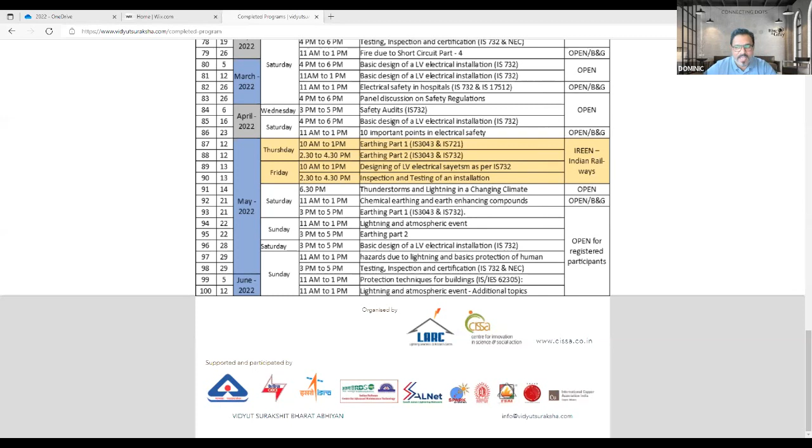Good morning, ladies and gentlemen. Today we are going to discuss an interesting subject on electrical safety: earthing, especially earth electrodes in soil - what they are and how they function. Chapter 17, don't look at that, it was part of my larger presentation; each section is 2 hours. So today we are going to discuss earth electrodes in soil.

Let me switch off the video for better connectivity. Now, the first point: almost every electrical engineer nowadays, not only electrical engineers but almost everybody working in a building, including tenants and owners, believes that a good earth electrode will solve all electrical safety problems. So whenever there's an issue, a shock, fire, arcing or sparking, the first job people do is to improve the earth electrode resistance. Today we are going to discuss whether this is really necessary or not.

Now, regarding the existence of earth electrodes, all of you know well that we used a protective device in low voltage engineering called ELCB, earth leakage circuit breaker. During the earlier days, nowadays ELCB is not even available in the market, but during the 1970s, 80s, 90s, or even 10 years back, ELCBs were quite common. What are these ELCBs? Imagine a transformer, a three-phase connection to some equipment, with a neutral as well, and I'm showing a TT connection where the consumer premise is connected to an earth electrode in soil.

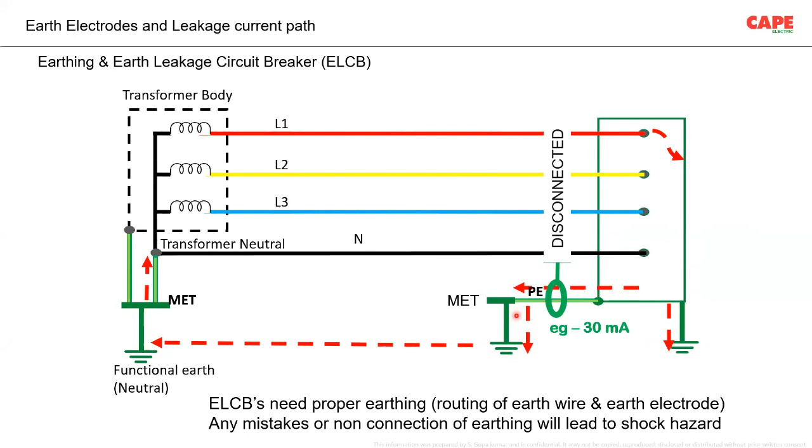But you should understand that ELCBs are nowadays outdated. Nobody uses ELCB in the market, I don't think it's even available anymore, except in some old installations. Nowadays, ELCBs are not used. You should also understand that for an ELCB, proper routing of the earth conductor and the earth electrode was important. However, currently, what we use for earth leakage protection or earth fault protection in a TT system is an RCD, a residual current device.

What does the residual current device do? It measures the current at a junction - the current of all the live conductors, all the current carrying conductors. Whenever there is a leakage of current, the current is escaping from this circuit, escaping from this junction. This device measures the current escaping from the junction, say 30 milliampere, and it trips.

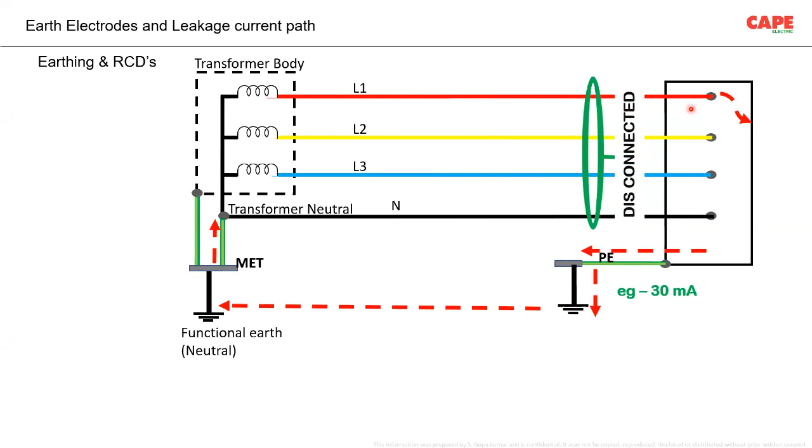Now you must understand the difference between ELCB and RCCB. Imagine in an RCCB there is no earthing. Imagine there is no earthing at all. The RCCB will not trip, and the body of this panel board will be live. As soon as the person touches it, since current starts flowing through the body of the person, the RCCB will immediately trip. So from this, you should understand that if you are using an ELCB...

Proper connection to the earth electrode, and the earth electrode itself, is important in order to ensure disconnection of the supply. Whereas in case of an RCCB, even if the earth electrode or earth connection is not available at all, the person will get a shock and the RCD trips. RCDs can be used as a protective measure against direct contact. Direct contact means even if somebody touches the live part, where I am scrolling, immediately the RCCB trips. Whereas with ELCB, it's not the case.

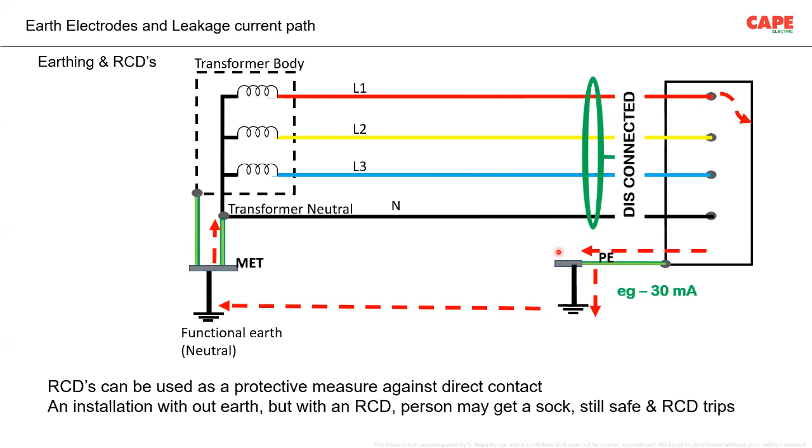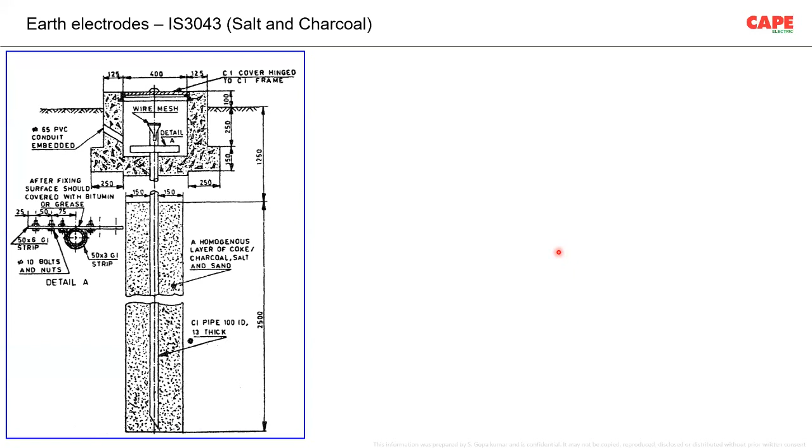So the use of ELCB and earth electrode was very important during olden days, especially before the introduction of RCCBs. After the introduction of RCCB, earthing and protective equipotential bonding is still very necessary and mandatory. But imagine in an installation you forget to connect to the earth electrode - still you are safe, because a person touching accidentally on a live conductor may get a shock, but before the shock becomes hazardous or serious, the RCCB trips. In IS3043, you can see two pictures.

One is how to make a typical way of making an earth electrode in soil, a vertical pipe and a plate. To my knowledge, these two are the pictures which are spoiling the whole knowledge on earthing.

After seeing this picture, people think that earthing means you buy salt and charcoal, dig a hole, put a pipe, fill it with salt and charcoal, then make a chamber and all these things. There are government buildings - last week I was at a railway station.

Outside the railway station, I could see at least 20-30 chambers. On the left side, you can see the chamber. Each chamber is about 200 millimeters above the soil level. This was actually spoiling the entire place. So basically, people think that earthing is as per these two pictures.

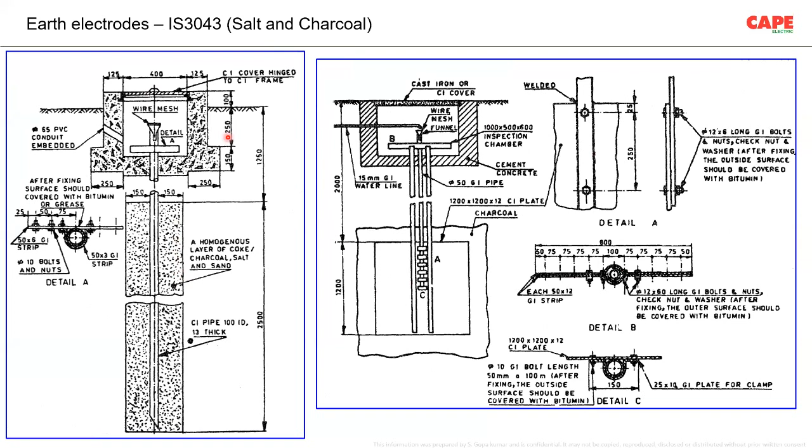I am so sorry to say that these pictures only give a typical example of making an earth electrode in soil. Whether you need an earth electrode in soil or not is explained in the standard, and most probably in a TN system, earth electrodes are not very much mandatory. In TT, of course, yes, we will see it later. As a result of these pictures from the IS standard, which was a very old standard from the 1960s or 1970s...

As a result of these two pictures, invention started. People started coming out with different earth electrodes - clean earth, computer earth, digital earth, analog earth - all these different names came into existence in India because of these two pictures. People started treating these as innovations of earth electrode. Unfortunately, wrong innovations. The second part is earth farm.

There are places where so many separate earth pits are made, each one for a typical application - like one or two for DG neutral, two for DG body, two for transformer neutral, two for transformer body, and so on. I call this an earth farm, a useless earth farm.

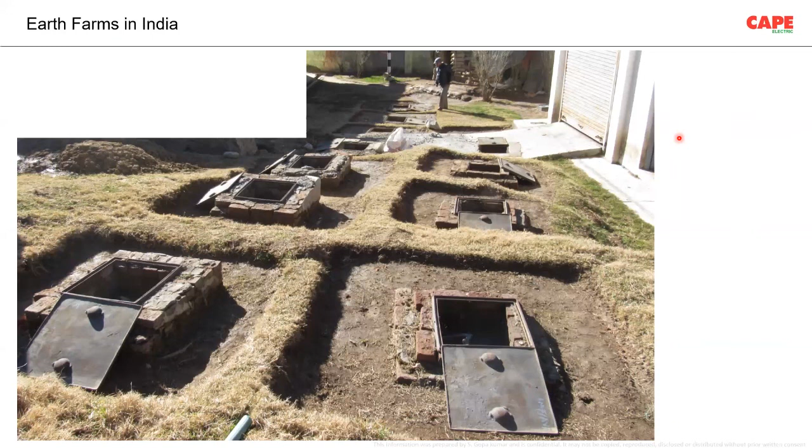Similarly with modern buildings - 2 weeks back I was in a data center and I was actually laughing after seeing the number of earth electrodes. There were about 220 earth electrodes all around. You actually require one, and there are 220. I don't understand why people use so many, and these are reasons for accidents.

But the way we follow electrical safety in our buildings, even if this kind of earth bomb happens, you shouldn't be surprised, because each part of the building is connected to a separate earth electrode. Then the joints get corroded, and such explosions happen. If somebody asks whether explosions are possible, I would say yes, of course. But I don't know whether this case is due to that kind of earth electrode or not.

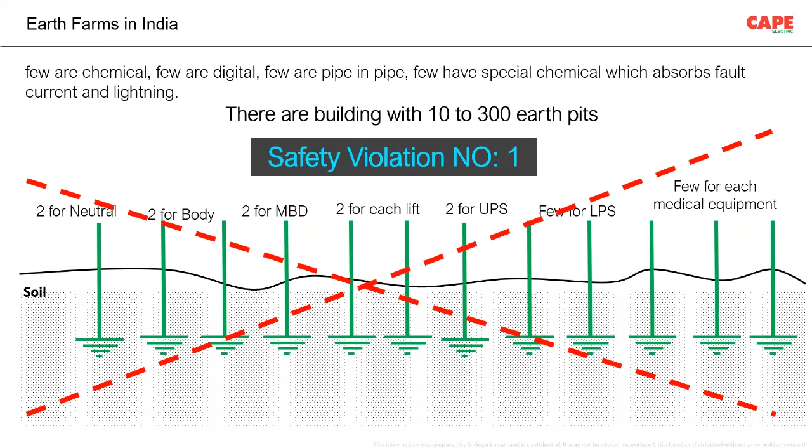So the first evil against electrical safety in India is the story called '2 for neutral, 2 for body.' This is the first safety violation. I repeat this every time in my presentation because it is the most important violation happening in India.

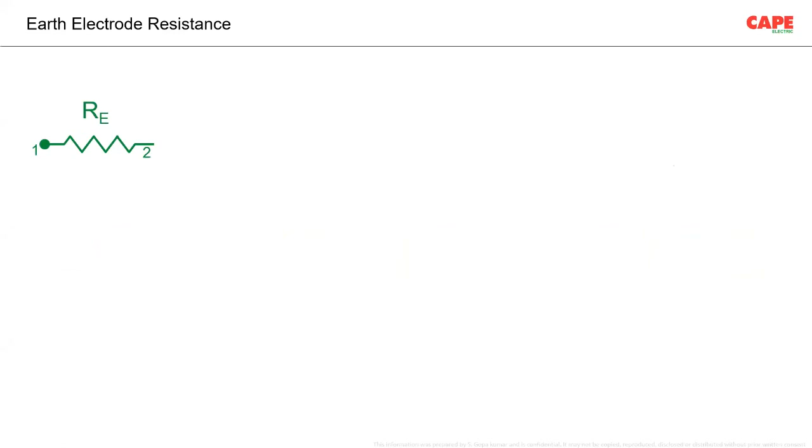Now let's look at what exactly this earth electrode resistance is. I am just showing a resistance RE. Generally, RE is the earth electrode resistance. The symbol is from point number 1 and 2. So point number 1 and 2, from here to here, there is the resistance.

And where is point number 2? Point number 2 is the infinite earth. Earth is infinite - it is zero potential. This is the belief, or this is the way we do things.

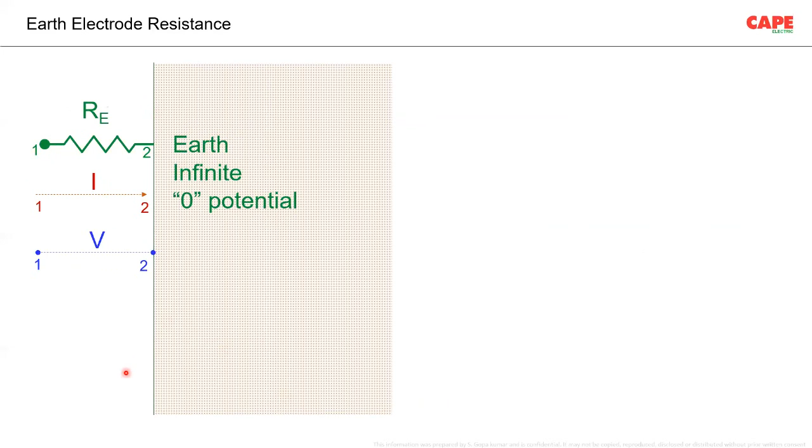You have the resistance R, and whenever there is a current flow through this particular resistance, there is a voltage drop in that resistor. Let us say in a typical case, whenever there is a current flow through this resistance, a voltage drop is created. Now if we put it in an actual situation, you can see the earth electrode number 1, the point at which you are connecting is point number 1.

Then you have the earth electrode in soil. Then you have, like a sphere, there is an area in soil, and your infinite earth is point number 2, which is far away from the earth electrode. Nobody knows how far. We can only make some calculations and take some approximations.

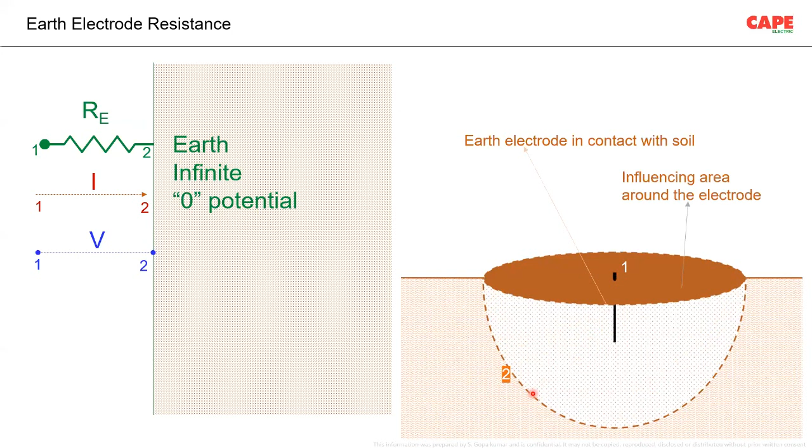So basically the electrode resistance, which we call Re, consists of three factors. There is an earth electrode, there is an influencing area around the earth electrode. Number one, the resistance of the earth electrode itself - imagine you have a 3-meter rod having some milliohms or micro ohms resistance. The contact resistance between the electrode and the soil.

The third one is the resistance of the soil from the electrode surface outward, in the geometry setup for the flow of current outward from the electrode to infinite earth. So the third factor, which is the soil in between the earth electrode and the infinite earth - these three factors influence the resistance Re.

Out of these three factors, the first one, resistance of the metal electrode, is actually immaterial because it's negligible. The second point, the contact resistance between earth electrode and soil - even though we generally say the first two are immaterial, actually sometimes the contact resistance also matters.

How does it matter? For example, if you have earth electrodes in rocky areas, you dig a hole and you fill the hole again with some stones. Under that condition, the earth electrode is not in good contact with the soil, so the contact resistance is high. Under that condition, number two is also a significant value, but generally the first two are neglected.

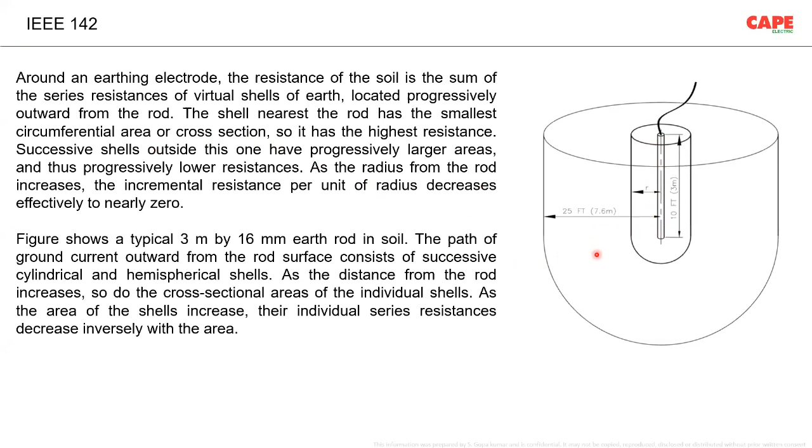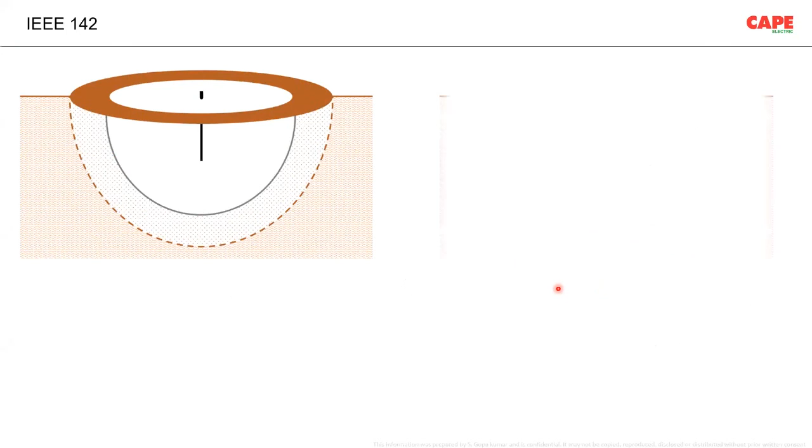They have put a rod, a 3-meter rod, and tried to measure the electrode resistance and its influencing area. And the influencing area is like this - each electrode has got multiple spherical areas which influence this particular rod, the resistance of this particular rod.

I have an equivalent circuit, I will show you. It is like, you see the resistance of one sphere, the resistance of 2, 3 spheres, 4 spheres, and finally n number of spheres. The resistance connected in this kind of fashion to the infinite earth zero potential, combined, we can call this the resistance Re.

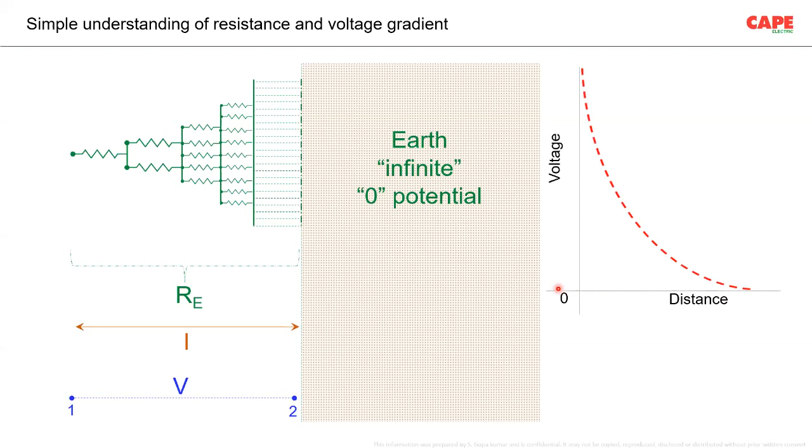Whenever there is a current flow, there is a voltage across that Re, which we call the voltage gradient. So at the point of the fault, whenever the current starts flowing, the voltage is at peak, and this peak is equal to the operating voltage of the circuit which is in fault. Let us say, for example, the fault is created by a 230 volt line in touch with the earth. In that case, the peak of the voltage is 230 volt.

I repeat this again - whenever there is a fault in 230 volt, the peak of the voltage gradient is only 230 volt. Why I made this statement again is, I used to get calls from users. They say they have to design an earthing system, fault current is 50 kiloampere, soil resistivity is 50 ohm meter.

So they ask help in making an earth grid or earthing system of 50 kiloampere. Now, once I ask what is your demand, they say the touch and step potentials must be lesser than 2 kV, 1 kV, or 600 volt, some voltages. But practically, most of these inquiries are coming for applications like low voltage, 230 volt. Actually in 230 volt, of course there is a voltage gradient, but within half a feet, the majority of the voltage is over, the shock is over.

In 230 volt systems, this is not very important. Instead, you make a protective equipotential bonding. Now, however, for a high voltage system, depending upon the operating voltage, the voltage is fatal. As a result, step and touch voltages can happen.

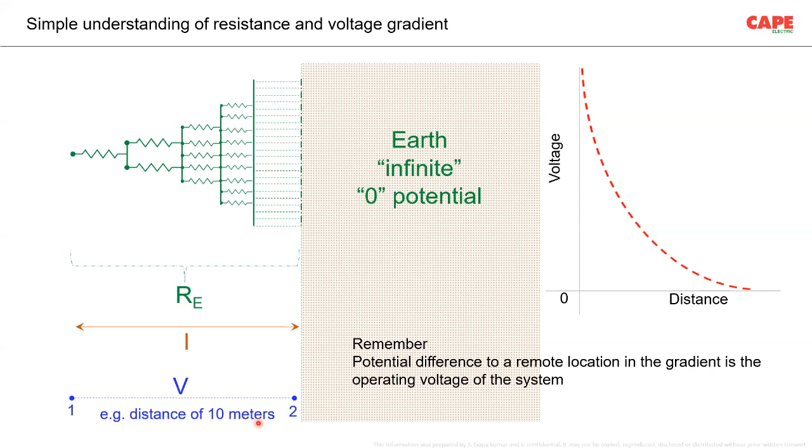For example, think that this voltage gradient is made at a distance of, let's say, 10 meters. If somebody asks whether in a typical place the 100% earth resistance is within this sphere of influence of 10 meters - technically it is not. In the IEEE 142 standard, you can find this particular table. They started measuring the resistance of the earth electrode with respect to distance, and approximately with a 3-meter rod, within 7.6 meters, the 100% value is achieved.

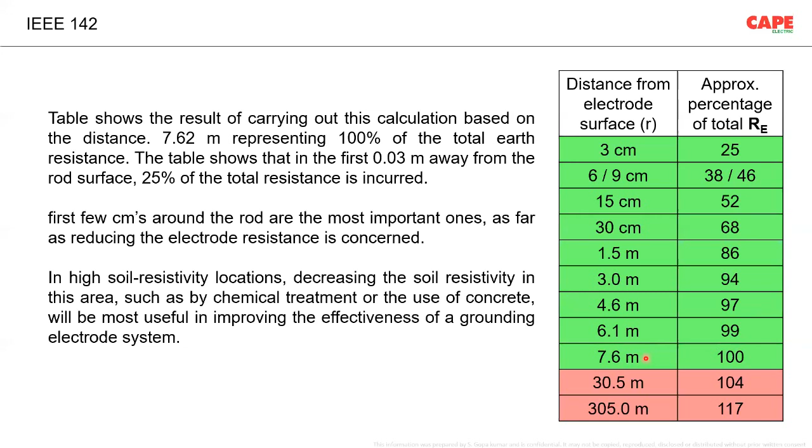But the measurement is still carried on at a longer distance, 30 meters, 300 meters. Still lower resistance values are possible, but the increase in influence is not significant with respect to the increase in distance. So a 270 meter increase gives only about 15% improvement. These are considered insignificant. As a result, we think that 100% is the RE value received within a typical area of 7.6 meters. This is only an example, but it varies from place to place depending on the soil resistivity.

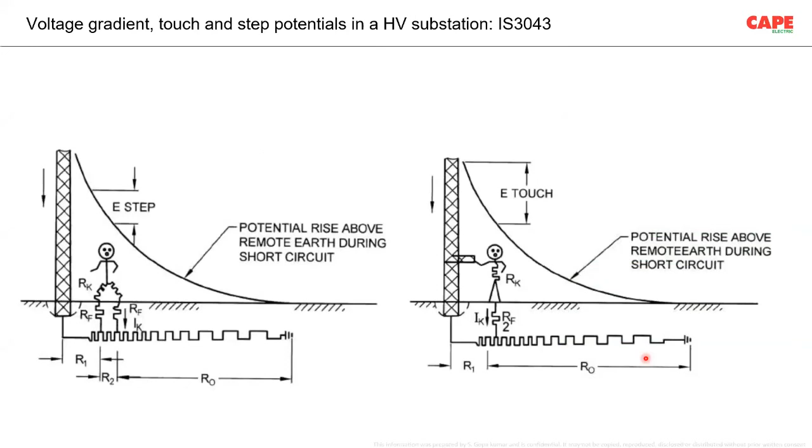For high voltage application, anything more than 1 kV, you have the step and touch voltage problems, which is explained in IS3043. Also in EN 50522, you can find these problems explained, such as the touch voltage, step voltage, and transfer potential.

Transfer potential, I'll explain here. You see, there is a transformer here, with an earth electrode plus earth grid. Whenever there is a fault current flow, the potential of this particular point is at a very high level. You have a touch voltage problem here, and a step voltage problem here.

Now the wire is also connected to a remote place. Let's say, for example, the armoring is connected to a different place. In that case, the armor will also carry the potential, and at a remote location there can be a transfer potential. So for high voltage applications, we are supposed to take care of step, touch, and transfer potentials.

Anyway, our subject is mostly into low voltage. Now, this is only an equivalent circuit which I am trying to explain, showing what will happen. You have a source, you have the line which is faulty, and at that place, faulty in the sense that it is in touch with the earth.

And now you have the RE here, which is going to create a voltage gradient at the place of the fault. And near the neutral, because the transformer neutral is also connected, there is another potential, the voltage gradient created.

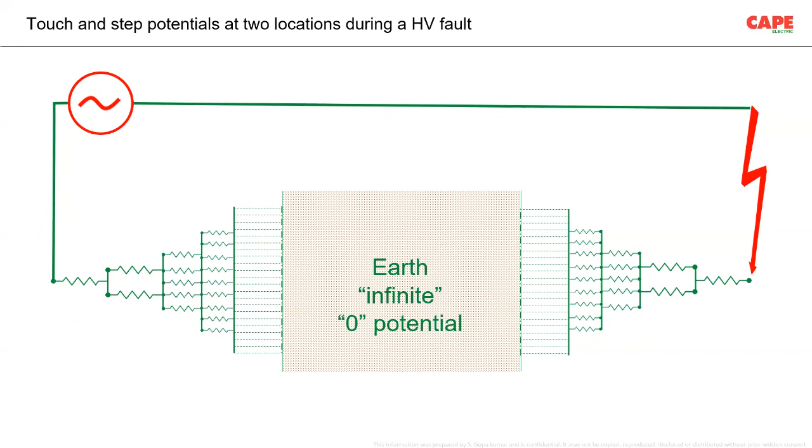Now, what you should always understand is - I am taking a red color line to represent if there is a metallic fault return path. If there is a metallic fault return path, actually the majority of the fault current will flow through the metallic fault return path.

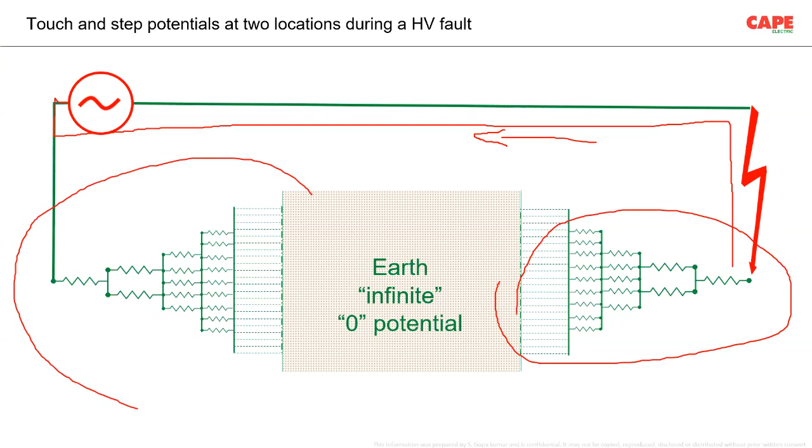But now, for high voltage substations, where the distance between the source and the secondary switching stations are far away, maybe tens of kilometers, hundreds of kilometers, then fault return through the metallic conductor is probably less, and in some cases the low resistance of these earth electrodes becomes practical. So basically, what you should understand is voltage gradients are created at the place of the fault, as well as when the current is returning back to the neutral of the system.

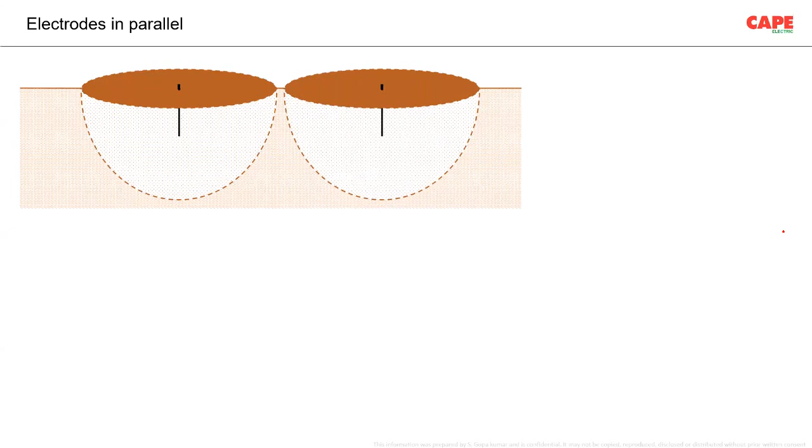Earth electrodes in parallel. In order to reduce the resistance of the earth electrode, a technique which is used is to have multiple earth electrodes in parallel. Remember, each earth electrode has got a sphere of influence. And if the second electrode is away from the sphere of influence of the first one, like the one in the picture, then you get a better value.

Earlier days, we were always saying that 2L is the distance between two earth electrodes. Imagine the L, length of one vertical electrode, is 3 meters, then the distance ideally, if it is more than 6 meters, gives a better value. But nowadays, standards, the availability of space, and other problems are coming up. As a result, the standards even started accepting at least L.

Spacing is required, is necessary. That means if you have a 3-meter rod, the next rod must be at least 3 meters away. Only then can you get better values.

Now for public electricity distribution, especially when you go for a TT system, there is a question whether the high voltage side and low voltage side are connected together or separated. Under certain conditions, electricity supply companies abroad consider this. In India, most electricity supply companies, to my knowledge, don't have this particular knowledge.

In Europe, or especially in the UK, in a TT system, the high voltage earthing and the low voltage earthing are separated for certain applications. If this separation is made, imagine this is the earth electrode of the transformer, and the neutral earthing at the secondary side of the transformer is made at the first post, at least 10 to 15 meters away. So higher distance is making a better value.

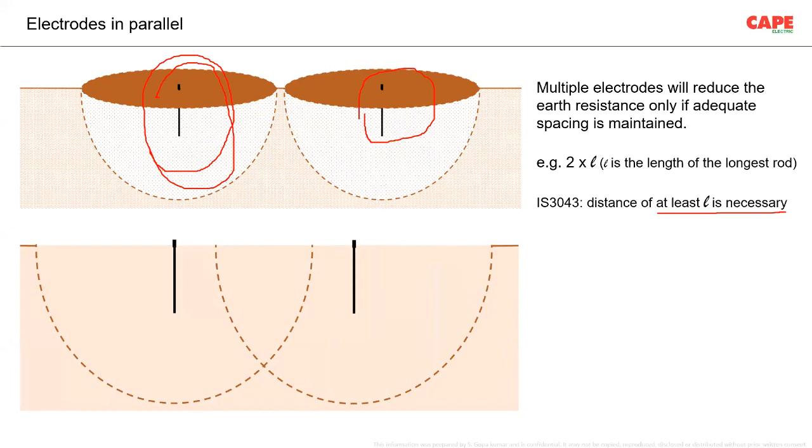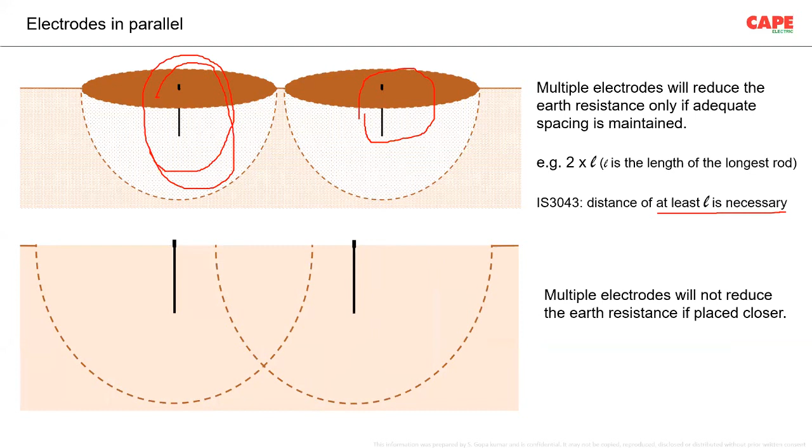Otherwise, multiple earth electrodes will not reduce the earth resistance if they are placed closer. But most electrical installations, if we visit practically, earth electrodes are connected quite nearby - 3-meter rods connected every 3 meters, or put in every 1 meter, not 3 meters, sorry, 1 meter.

Now for low voltage consumer premises. Imagine you have a house or a small industry where you are getting 230, 400 volt line, and if you have a TNS system, industrial and commercial application, earth electrode resistance is immaterial. In the sense, if the earth electrode resistance is 10 ohm or 50 ohm or 100 ohm, it doesn't matter. TNCS system for public distribution, earth electrode resistance is also immaterial.

TT system for public distribution at consumer premise, if you are using a 30 milliampere RCD, the resistance recommended in the standard is 1666 ohm - you can see it in table 14. If you use a 300 milliampere RCD in a TT system, then the earth electrode resistance is 166. These values are a little bit higher; probably it is not the earth electrode resistance, it is actually the impedance of the entire loop.

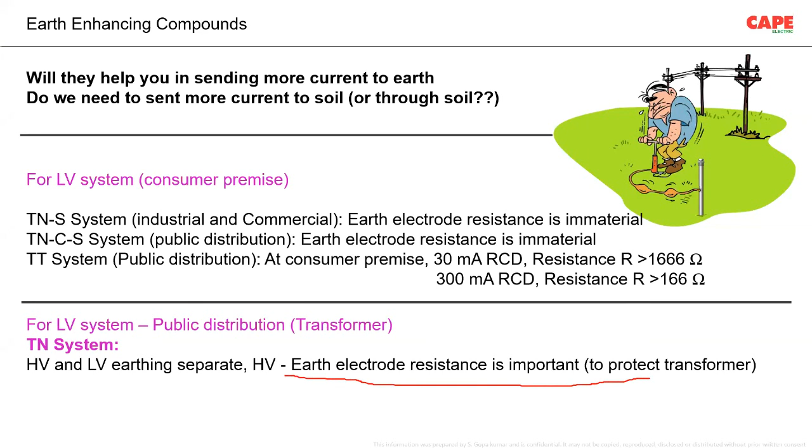Now for low voltage public distribution, for the utility company - the first one for LV system is applicable for a consumer premise if you are a user of electricity, whereas this is applicable for the electricity supply company. If they go for a TN system, and if they go for HV and LV earthing separate, meaning the transformer HT side and neutral earthing separate, then the high voltage side earth electrode resistance is important to protect the transformer.

Otherwise, the transferred potential during a fault at the HT side of the transformer may kill the LT winding. So for the public distribution company, if they go for HV and LV earthing separate, the HV earth electrode resistance is important. In case of a TT system, again if they go for HV and LV earthing separate, the HV earth electrode resistance is important to protect the transformer. If they go for HV and LV earthing together, then earth electrode resistance is important to protect the consumer premise - our houses.

What does this mean? Electricity can be supplied from the transformer under several methods - TNS, TNCS, TT and so on. If the distribution company is using a TN system and wants to make HT and LT earth electrodes separate, then the HV side earth electrode resistance is important. Number two, if they go for TT system and want to make HV and LV separate, in order to protect the transformer, earth electrode resistance is important. Now, if HV and LV is together, in order to protect the consumer premise, earth electrode resistance is important.

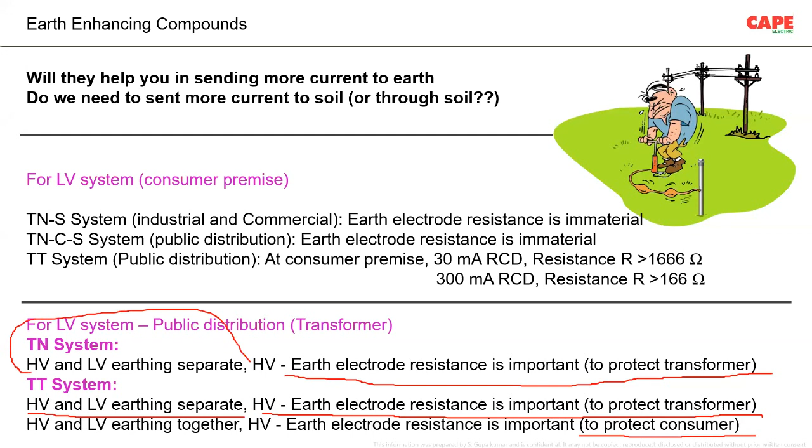But if we look at it from the point of regulation, we are actually supposed to follow the TN system, not separate but connected together, so that everything is safe. I will explain it later.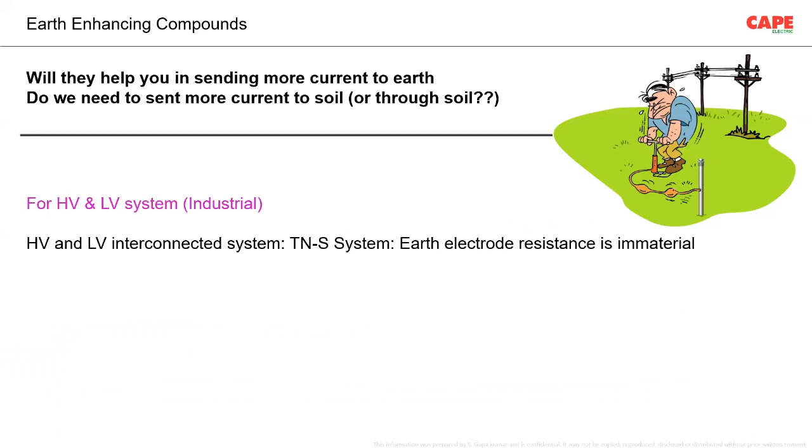Now, for industrial system - industrial and commercial system, what we mean by this is you have a transformer either close by, or you have your own transformer.

You have an 11 kV bar 400 volt transformer, or a 33 kV bar 400 volt transformer. In that particular case, if you go for a HV and LV interconnected system, meaning the HT side and the LT side are interconnected, and your LT is a TNS system - this is the recommendation of the standard. In that case, earth electrode resistance is immaterial - you don't need to measure or have an earth electrode of 1 ohm, 5 ohm, 10 ohm, 20 ohm or whatever. That is immaterial. Now, for lightning protection system...

If type A lightning protection system, earthing is important. In fact, electrodes in soil are important. Lightning protection system earthing is classified into type A and type B. Type A can be a vertical or a horizontal conductor. I have a picture I will show you later on.

If you go for type A earthing, one of the techniques adopted is a 10 ohm resistance. So if you practically look at today's modern building where you have your own transformer, or a transformer very close by, the only place where you want a 10 ohm resistance is an earth electrode for the lightning down conductor. If you go for type B earthing, foundation earthing, or ring earthing, then this value is also immaterial. In type A earthing, the earth electrode may require an earth electrode resistance lesser than or equal to 10 ohm - we will see this later. This is the only place where you need a specific value of earth electrode resistance in an industrial, commercial, or consumer premise.

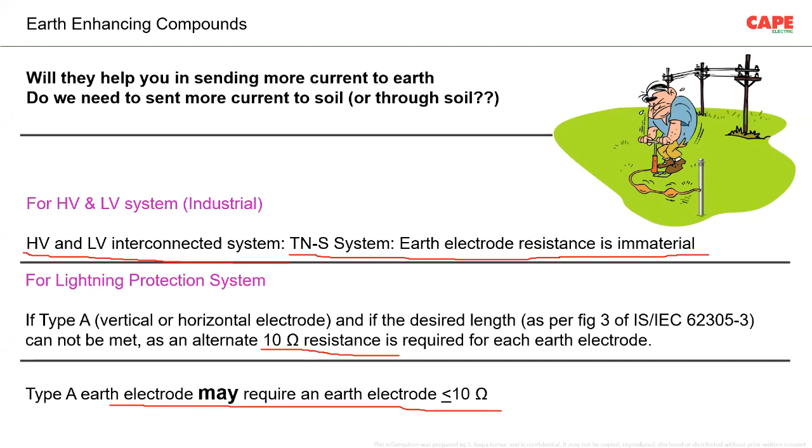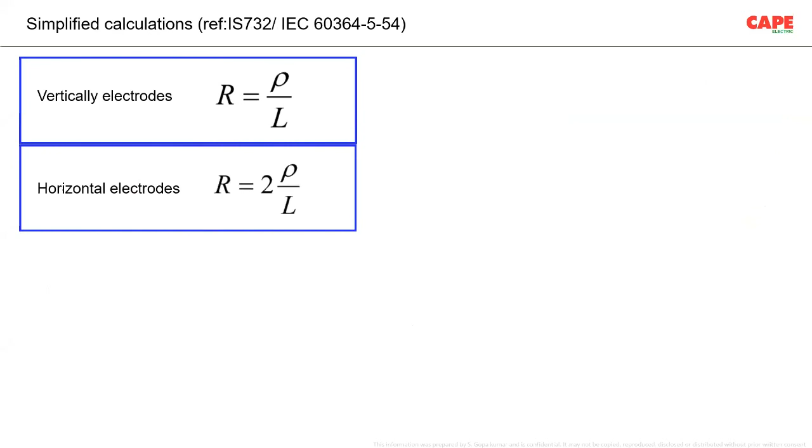Now, how to calculate the earth electrode resistance? In IS3043, a lot of formulas are there - complicated formulas. But nowadays these formulas are being simplified. IS732 has got very simplified formulas like this.

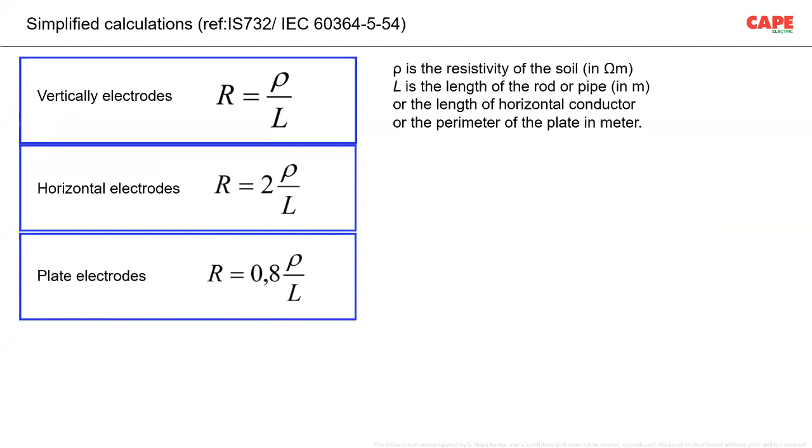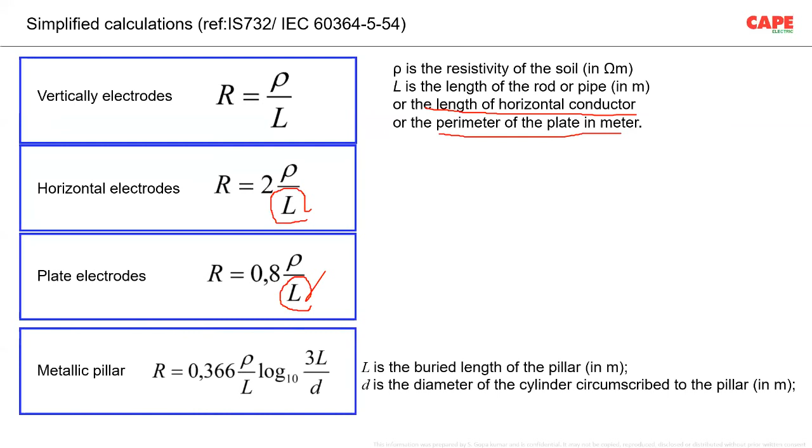R equals rho by L. You know very well that rho is the resistivity of the soil in ohm meter. L is the length of a pipe or vertical conductor. The second case here, L is the length of a horizontal conductor. In this third case, it's the perimeter of the plate in meters. The fourth case - if you have a buried metal pipe or structural part, you can also find out the earth electrode resistance. A simple calculation.

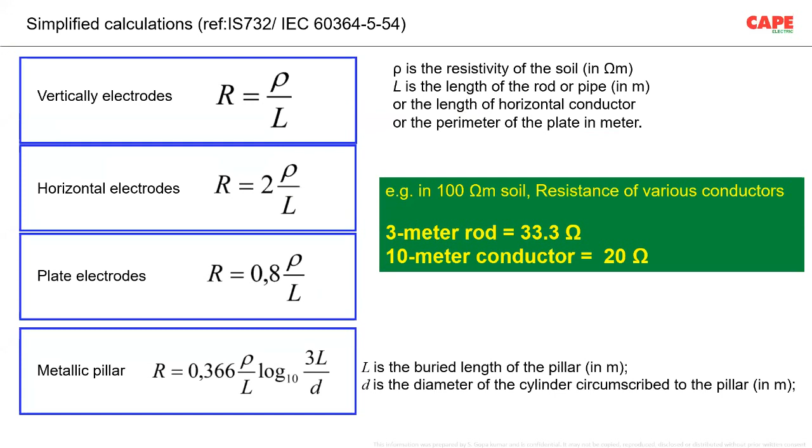Imagine you have 100 ohm meter soil and a 3 meter rod, then the earth electrode resistance is 100 divided by 3, approximately 33.3 ohm will be the resistance of your earth electrode. If you have 100 ohm soil resistance and a 10 meter conductor horizontally, then the resistance is 20 ohm. So by making these simple calculations, you can find out the resistance of the earth electrode in soil. Technically speaking, for low voltage application, you don't need to make such accurate calculations because it's not going to help you - even if the earth resistance is 3 ohm or 30 ohm, it doesn't matter. So these are included in the upcoming IS732.

Now, a technique used to reduce this earth electrode resistance is to have something in the soil surrounding the earth electrode - the area surrounding the earth electrode which may influence and reduce its resistance. Now, first we should understand what this soil resistivity is.

Soil resistivity depends on the type of soil. I'm sure most electrical engineers know this particular table. The resistivity probable value in ohm meter depends on different kinds of soil. You can see the values - 5 ohm meter, 20 ohm meter, 50 ohm meter, 300 ohm meter, 2000 ohm meter, like that. What you should also keep in mind is the corrosion.

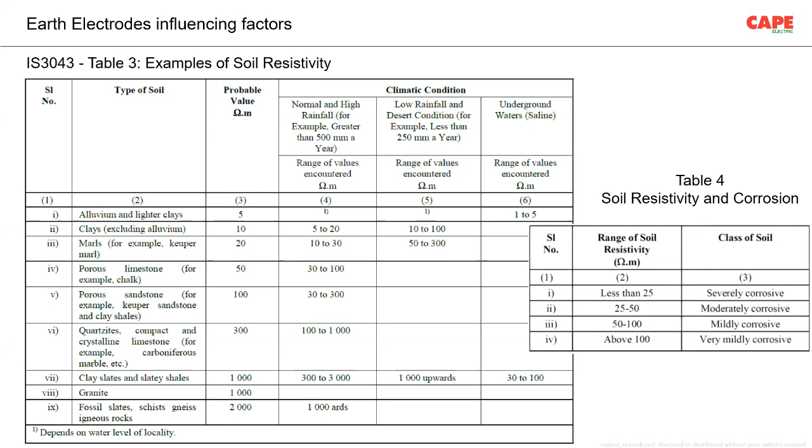In soils with low soil resistivities, let us say less than 25 ohm meter, the soil is severely corrosive. On the right side you can see here, severely corrosive - so this soil is severely corrosive. That means in places where soil resistivity is less than or equal to 25 ohm meter, you have to be very careful because the earth electrode can be eaten away very fast - it can corrode very fast. Then moderately corrosive, mildly corrosive, and very mildly corrosive. So anything above 100 ohm meter is very mildly corrosive. What you should understand is, a low soil resistivity offers a low earth electrode resistance, but it increases the corrosion of your earth electrode.

What does it mean? Imagine you have a 100 ohm meter soil and you put an earth enhancing compound of, let's say, 0.2 ohm meter resistivity in and around that earth electrode. With 100 ohm meter soil, probably you are getting 10 ohm resistance, and with the additional material you may get 8 ohm resistance. But this 2 ohm improvement is actually degrading the life of your earth electrode, because the material around the electrode is highly corrosive. As a result, the chance of corrosion of your material is high.

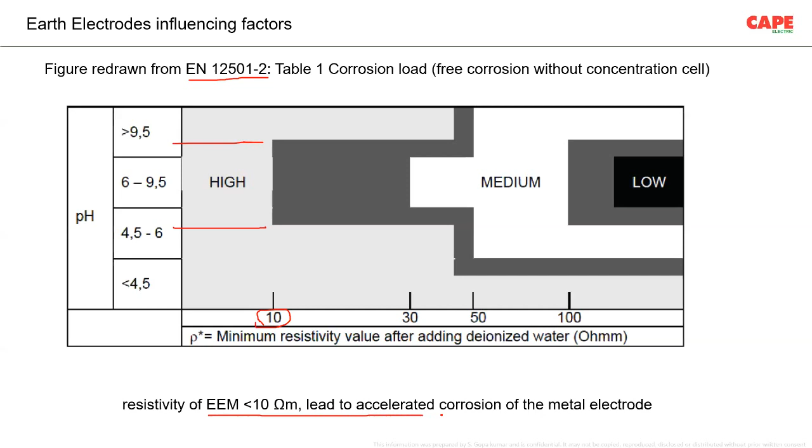So any earth enhancing material having a resistivity less than 10 ohm meter leads to accelerated corrosion of the metal electrode. Understand that corrosion is equally important, because you are installing a metal in soil and it should give a life of at least 10-15 years, or even 20 years. But with the earth enhancing material, probably in 3-4 years the whole thing is gone.

Now, the other influencing factors... the other influencing factors are the moisture in soil.

Moisture in soil is a very, very influencing factor. On the x-axis you can see the percentage of moisture up to 70%. Once the moisture is lesser than 10%, the resistivity of the soil increases drastically. Imagine a soil where the moisture is 0 - nobody knows what is the peak value. So moisture is an important factor in soil resistivity. In dry soil, resistivity is extremely high, probably 10,000 ohm meter.

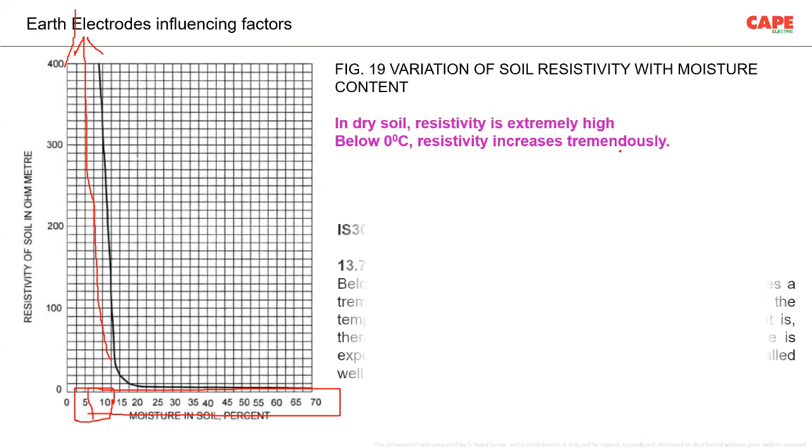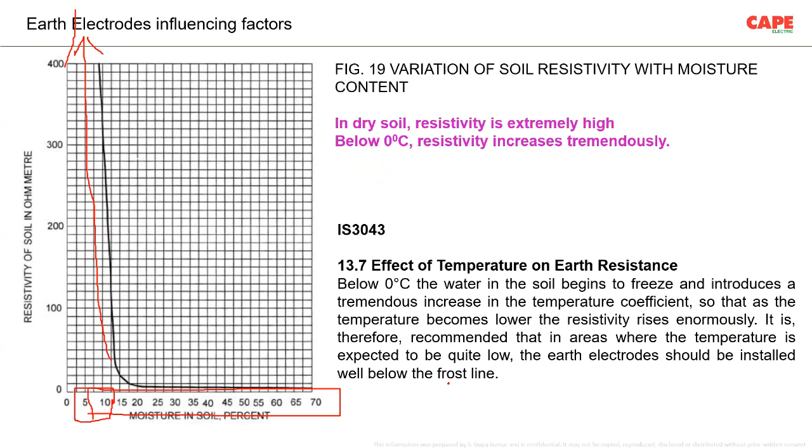Below 0 degrees centigrade, resistivity increases tremendously. In IS3043, clause 13.7 states: below 0 degrees centigrade, the water in the soil begins to freeze and introduces a tremendous increase in the temperature coefficient, so that as the temperature becomes lower, the resistivity rises enormously. It is therefore recommended that in areas where the temperature is expected to be quite low, the earth electrode should be installed well below the frost line. How deep below the frost line is a big question - we will discuss it later.

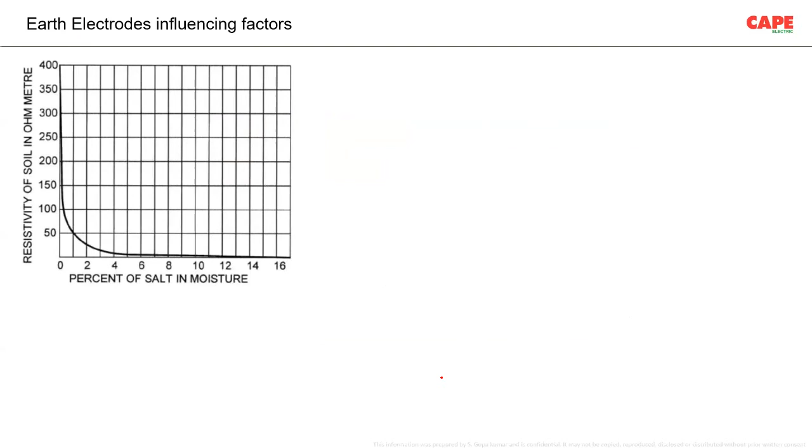The second factor influencing the earth electrode resistance or soil resistivity is the salt content, percentage of salt in the moisture - you can see the particular graph. The third factor is the length of the earth electrode in soil. Of course, the diameter of the earth electrode is also a factor, which we will discuss as the last point.

Now, in a typical 100 ohm meter soil with a 25 mm rod, from this table we see that if the length of the rod is 1.2 meter, you simply calculate 100 divided by 1.2, which is approximately 90 ohms. So at 2.4 meters, 45 ohms; at 3.6 meters, 25 ohms; and a 4.8 meter rod in soil will give a resistance value of 23 ohms.

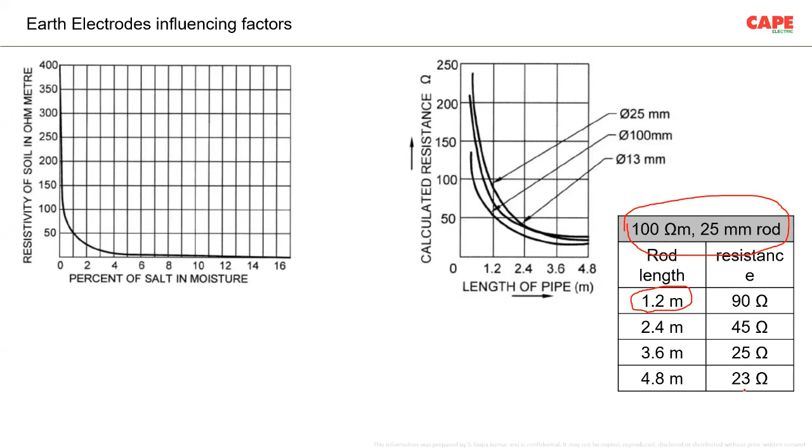These tables are also there in IS3043. This particular table is actually derived from IEEE 80, which explains the effect of temperature, moisture, and salt in a typical case. On the left side you can see the soil resistivity. Curve number 3 is for temperature, curve number 2 is moisture, and curve number 1 is salt.

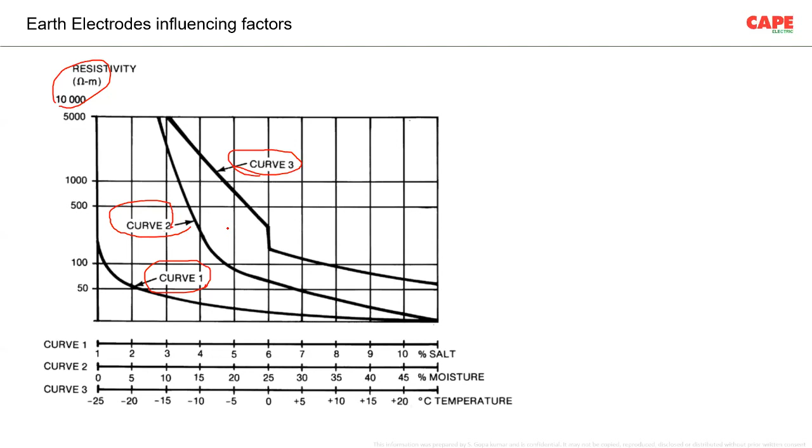More than the salt, moisture matters - if the soil doesn't have moisture, the value is too high. And if the temperature is minus, then the problem is even higher.

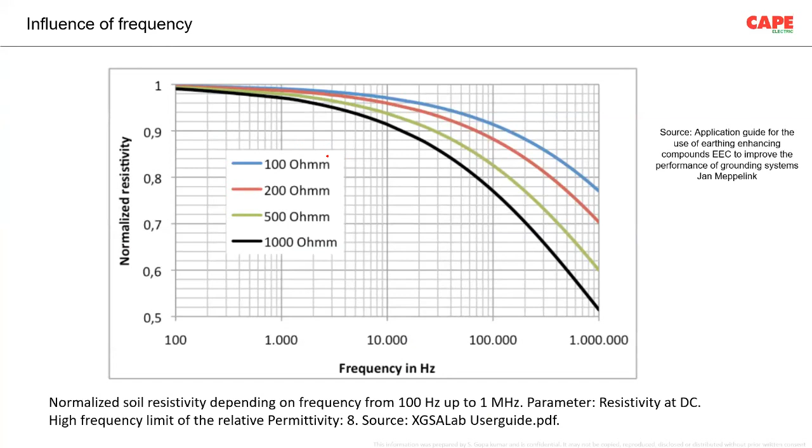Influence of frequency, again from the same paper. I don't want to explain it much because we have so many other points to discuss.

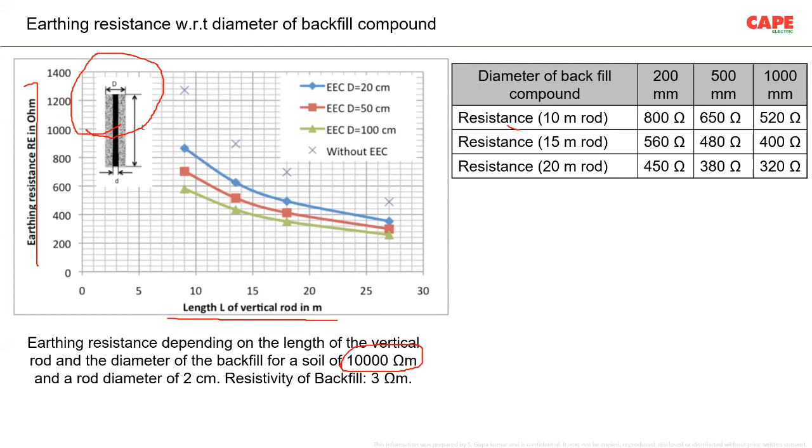Under that condition, the length of the vertical rod in meters and earthing resistance, the final value, I have put it in a table. In a typical case, the soil resistivity considered here is 10,000 ohm meter. If you have a 10 meter rod, the resistance is 800 ohms. If you have the earth enhancing compound 200 millimeters all around, or if you have the earth enhancing compound 1000 millimeters, that means 1 meter all around the earth electrode, then you get a value of about 520 ohms.

The same increased rod length, the resistances are given.

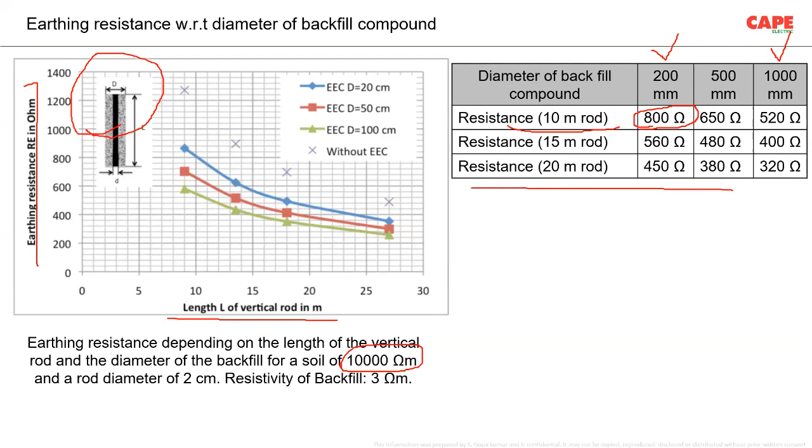Similarly, a lot of time people ask a question whether the resistance of earth enhancing compound really influences the resistance of the final RE value.

Again, from the same paper, they have made research on a backfill compound of 0.4 ohm meter, backfill compound of 2.3 ohm meter, and backfill compound of 100 ohm meter. So different backfill compounds are used for an earth electrode with constant diameter, and you can see here the final values for all of these earth enhancing compounds with different resistivities are similar. So the conclusion is the resistance of earth enhancing compound does not have much influence on the final electrode resistance.

Why I put this into the presentation is, lot of times customers call us saying I need an earth enhancing compound of 0.12 ohm meter, or somebody asks for 0.2 ohm meter. Actually, whether the resistivity of the earth enhancing compound is 1.2 ohm meter, 0.12 ohm meter, or 12 ohm meter, it actually doesn't matter.

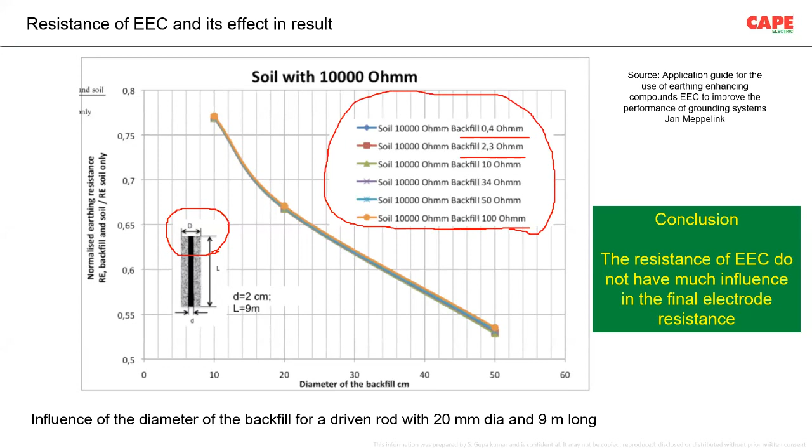So you can see here in the table, a backfill compound starting from 0.4 ohm meter to 100 ohm meter, the final result is almost the same. There is no big change. The conclusion is the resistance of the earth enhancing compound actually doesn't matter.

A study has also been made with different soil resistivities: 500 ohm meter, 1000 ohm meter, 5000 ohm meter, and 10,000 ohm meter. The diameter of the filling material, the earth enhancing compound, is 10 centimeter, 20 centimeter, and 50 centimeter, with resistivity of the backfill compound at 1 ohm meter, 10 ohm meter, 100 ohm meter, and so on. Now, what you will see is probably the most important information I wanted to give you today.

If the soil resistivity is, let's say, 0.5 ohm meter for the earth enhancing compound, and if you have 100 millimeters, or 4 inches, filled with this particular material, then the improvement on the final RE you are getting is about 22%. What this means is, in a typical soil without earth enhancing compound, imagine the resistance you are getting is 10 ohm. With earth enhancing compound all around the electrode at 100 mm, you get a 22% improvement, that means the value is about 7.8 ohm instead of 10 ohm.

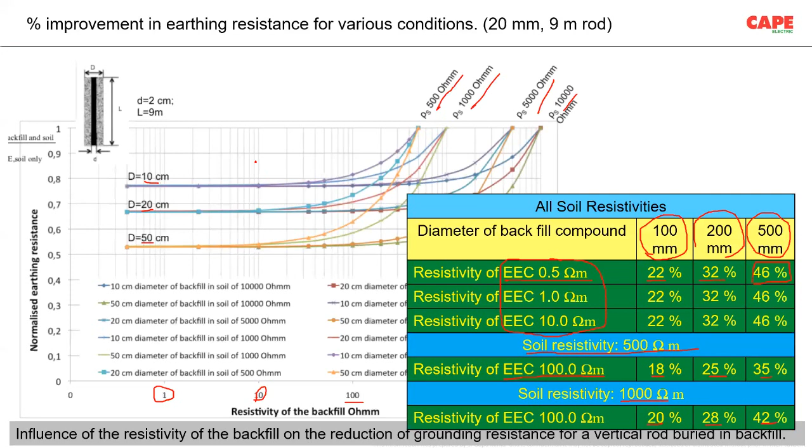Even with a magic compound, in normal condition 10 ohm, the best you can get is about 8 ohms if you fill 100 millimeters, something like this. So these reports will be published in that particular blog, which I will give you later on.

Now the same, I have made a comparison. Imagine the soil resistivity of 500 ohm meter. In normal condition, a 20 mm rod 9 meter long will give almost 62 ohms RE resistance. If you fill all around the electrode with 100 millimeter dia earth enhancing compound, you get about 48 ohms. If you fill all around the electrode with 500 millimeter dia, you get a value of 33 ohms.

So practically filling the whole area with 500 millimeters of the earth enhancing compound will be a very expensive measure. Instead, you can add 2 more earth electrodes a little bit away and get the same result. So basically, these materials also have a lot of limitations.

Don't think that a chemical will solve all my problems. No, it is not like that. The chemical, depending upon the area which you are filling, 100 millimeter average, gives about 20 or 22% improvement, irrespective of whether you are using X make or Y make.

Now, the alternate method is, you can see here on the table, on the left side, you have a normal rod. The soil resistivity is 5000 ohm meter, a normal rod, 20 mm rod, you get a resistance of approximately 635 ohm. Now, all around the same rod, a 50 centimeter backfill compound is used, almost half meter of backfill compound, and the backfill compound is having 2 ohm meter.

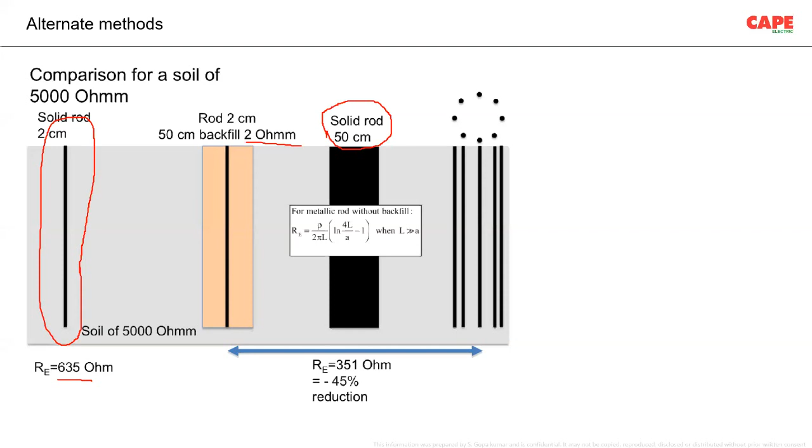Under that condition, or if you use a solid round conductor of half meter, which is practically not possible, or if you use a cage, the results are the same. It also means, instead of filling up this area with the earth enhancing compound, if you put a 500 millimeter pipe, or a cage of 500 millimeter, the result is going to be the same, because it is improving the area basically.

So instead of backfill compound, the same result is achieved by increasing the diameter of the electrode, something like this. The earth enhancing compound, where I am moving the cursor, increases the virtual diameter. In the second case, the physical dimension of the pipe itself is equal to a large area. In the third case, a cage is made. So in all 3 cases, the result is the same.

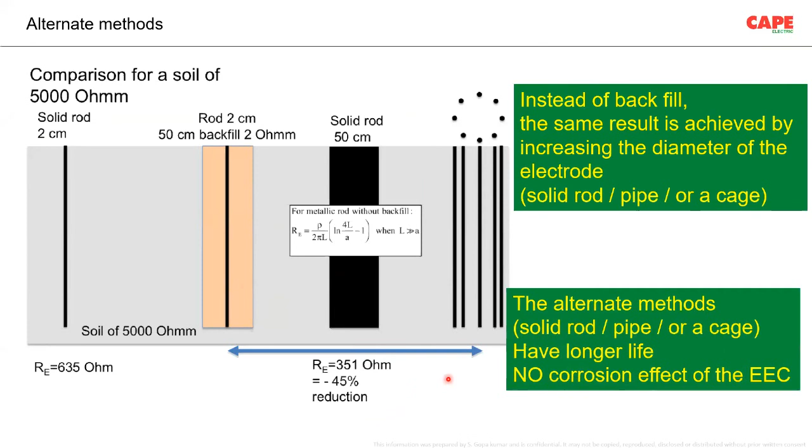Now, as an alternate to earth enhancing compound, these techniques also can be used. The advantage of these 2 techniques, a larger diameter solid pipe or a cage, is that earth enhancing compound actually increases the corrosion of your electrode, whereas with these 2, the corrosion is influenced only by the soil, not by the earth enhancing compound, because earth enhancing compound accelerates corrosion due to its low resistivity.

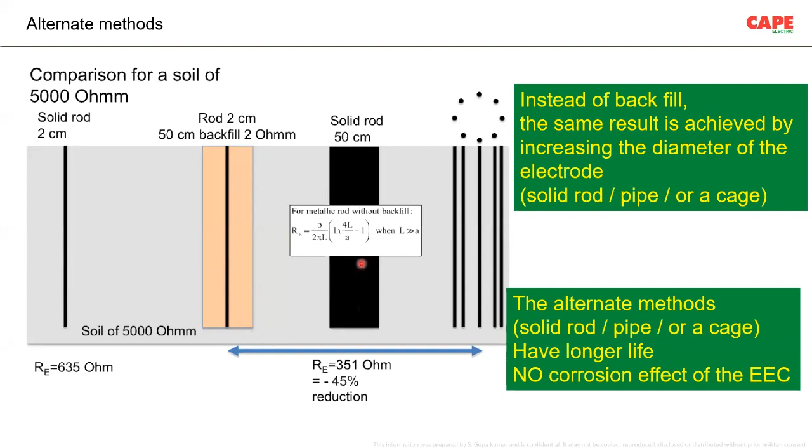So in these 2 cases, practically you can have a longer life, because the corrosion is immaterial. The same paper, which I will put up, is a research paper, internationally vetted. The same paper also explains a horizontal conductor.

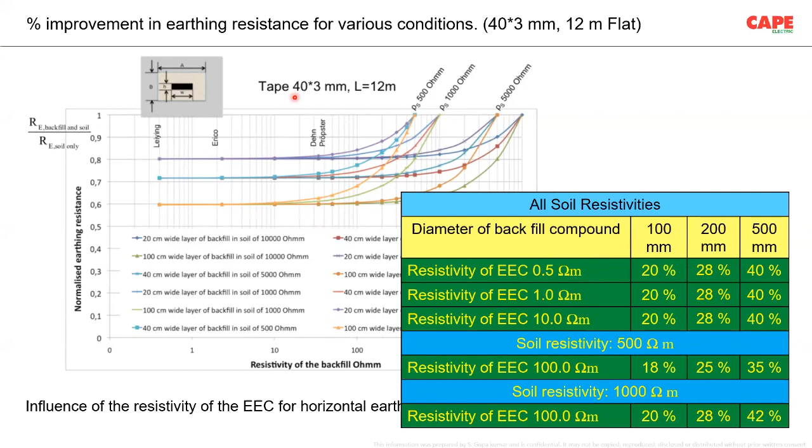So basically, from the picture, what you can find is the earth enhancing compound. Let us say here, one of the makes. Let me draw it a moment. In this particular case, the earth enhancing compound is something about, let us say, 20 ohm meter. Or this make, let us say, 1 or 2 ohm meter, or this particular make which is lesser than 1 ohm meter. Actually, the final values are similar. There is no big change. So again, this study report shows that the resistivity of the earth enhancing materials is immaterial.

In improving the resistance.

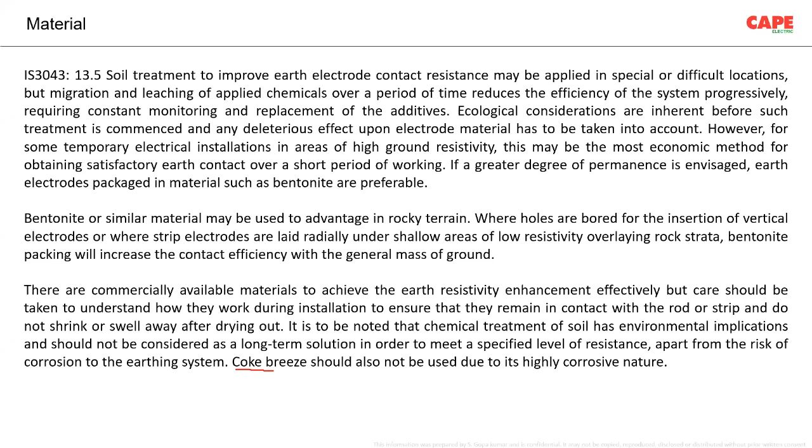IS3043, point number 13.5, talks about how to make the soil treatments, what are the advantages, what are the disadvantages. The final line you can see here: coke breeze should also not be used due to its highly corrosive nature. If you use coke breeze, of course, it will accelerate the corrosion.

Now, actually, this subject, earth enhancing compound, is a very, very sensitive subject in our country. It's sensitive in the sense that most of the time manufacturers claim so many exorbitant stories.

Imagine one manufacturer claiming, I have an earth enhancing compound produced in Dubai in a specialized environment, in a specialized area, which wherever you put, your earth resistance becomes 0.5. Another manufacturer claims, I brought it from the Himalayas, so this is special. Another fellow says, I brought it from mid of the sea, so this is special. All these claims are there. Unfortunately, these are only claims.

So problem number one is the exorbitant claims of the manufacturer. Number two, non-awareness of the users believing the claims due to technical and commercial reasons. Technical reasons, for example, most of the time there is a fault or damage to the electronics, and the safety engineer, say for example, a UPS has failed. The UPS vendor will come and say, sir, it is due to the higher resistance of the earth electrode, so you have to have an earth electrode of 1 ohm. It's a technical reason. Now the client always tries to reach 1 ohm. Technically, this is wrong. So such non-awareness is one of the reasons.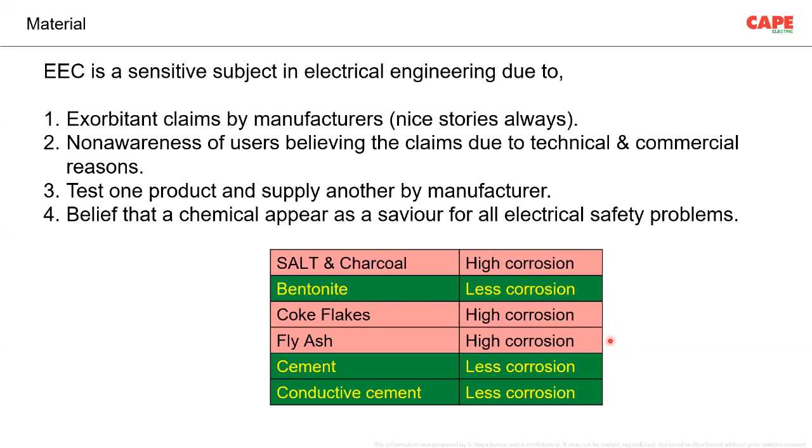Now, to give some background, let me explain what kind of standards are available from standard publishing bodies. Taking IEC as an example: IEC has international standards, meaning rules, and technical reports which are not normative—not a rule, just for information. There are also technical reports and technical specifications. If you see an IEC standard coded TR or TS, understand that these are informative, or are supporting some of the standards.

Similarly, in IEEE, standards are classified as either a standard containing mandatory requirements, a recommended practice outlining preferred procedure, or a guide offering suggestions—so there are three types of documents. Now I am showing you three IEEE standards. IEEE 80 is a guide for safety in AC substation grounding, so it is guiding, not a mandatory requirement, nor a recommended practice. IEEE 142 and IEEE 1100 are recommended practices.

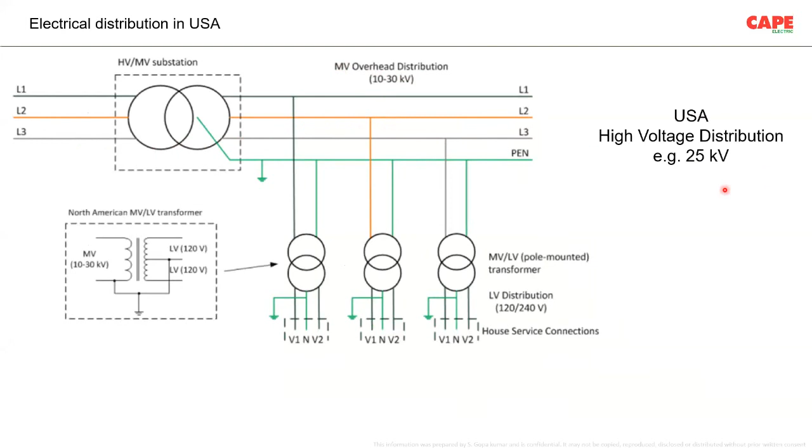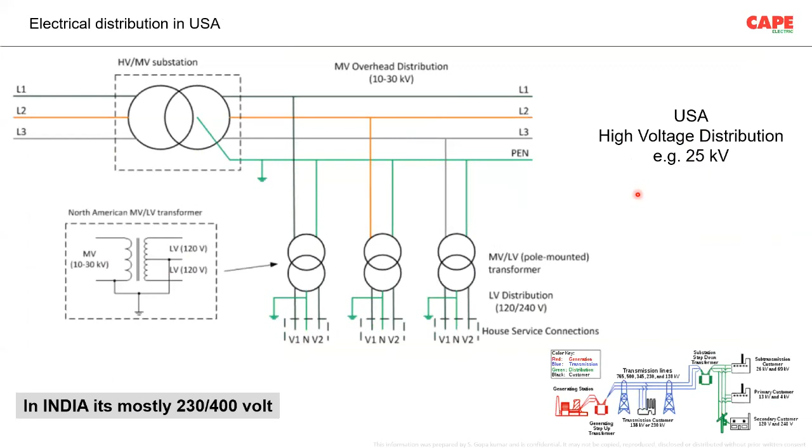Now, how is this IEEE 80 actually used—very important. In America, they have high voltage or medium voltage distribution, say 25 kV, whereas in India we have a different system. I learned this particular information while working with BIS standards, where every time there is confusion, we have to try to clarify it.

So I wrote to one of my friends, Dr. Abdul Mousa—a very senior scientist whom a lot of electrical engineers know personally. He is from Canada. I asked him exactly how the system works and how IEEE 80 is applied. He told me that in North America, where IEEE originated, the distribution is usually 25 kV, and every house has a pole-top transformer—IEEE 80 is not used there. It is used for 230/25 kV or 138/25 kV systems, these extra high voltage substations. That is where IEEE 80 is really used in America.

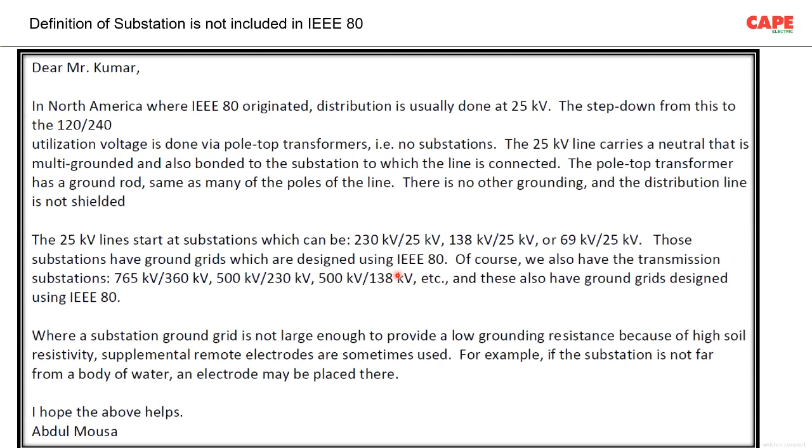But the problem with IEEE 80 is that nowhere is the applicable voltage written—the definition of substation is missing in IEEE 80. About two years back, an IEEE delegation came to Delhi, and there was a common seminar.

I made a presentation to all the participants. Then finally, we had an interesting discussion about IEEE 80.

There was a delegation and they told me they would clarify my doubt, because I wanted to tell them very clearly that IEEE 80 is used in a wrong way in India. It is used for low voltage applications. I asked them to make a letter or something saying that IEEE 80 is not applicable for low voltage installation.

This gentleman went back and sent me a reply: 'I will ask my staff to forward the described situation to the IEEE 80 sponsor for consideration. It is against IEEE policy to offer interpretation on standards, but the sponsor can consider your comments in future revisions.'

The first information I got from the reply, I think Mr. Sam, a senior person in IEEE, an office bearer, told me he would forward it to the IEEE 80 sponsor. Sponsor means somebody, probably some committee, is sponsoring this particular standard, and they have to decide whether to include a definition or not.

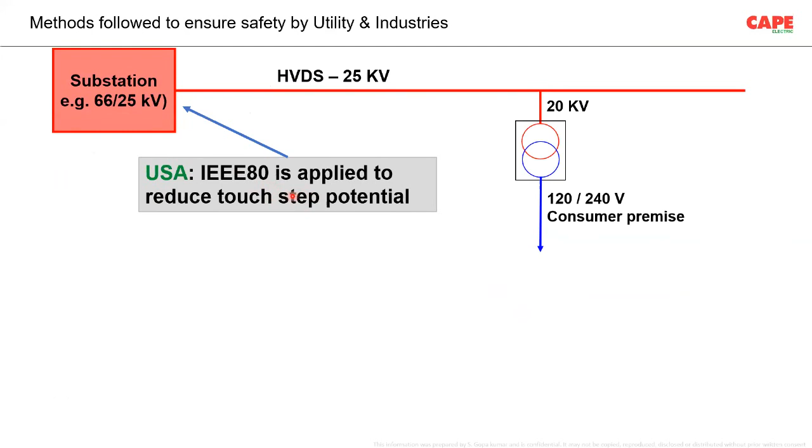So the conclusion from this is: in America, they have substations, and IEEE 80 is used in the substation, say 66 kV or 25 kV, where touch and step voltage reductions are made. Whereas in India, we use the same principles for an 11 kV or 230 volt transformer. This is actually wrong. We are supposed to use it at a substation, a transmission or distribution substation.

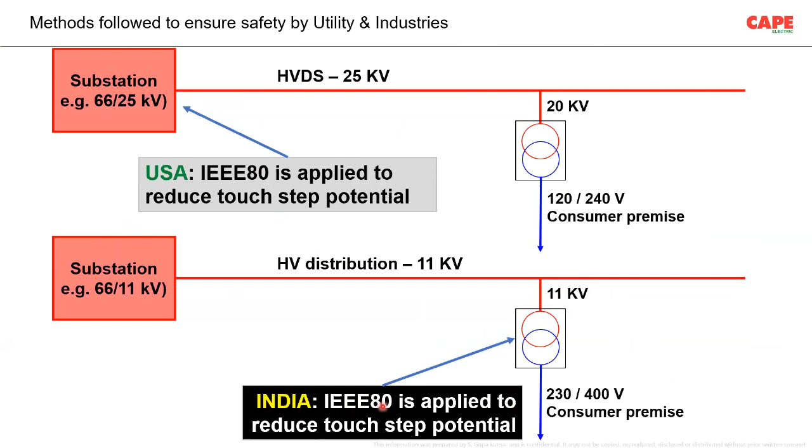So what I wanted to tell you is, even though earth enhancing compounds are written in several standards, please understand the reason behind it. It predominantly concerns low voltage electrical installations, meaning a consumer premise, probably with a transformer of 11 kV, 22 or 33 kV. Under that condition, these earthing principles are practically not applicable. This is what I confirm.

Then what exactly should you do for a consumer premise? It is protective equipotential bonding. Protective equipotential bonding means you have to interconnect all the metal in your building in such a way that the touch and step voltages are lesser.

Under that condition, you need an earth electrode in soil if you have a TT system, and this earth electrode resistance can be up to, let's say, 200 or 300 ohms, nothing happens. If you have a TT system, you need one earth electrode in soil for taking the fault current back. If you have a TN system, then you have a metallic connection back to the neutral of the source. So basically we are talking about this earth electrode in soil.

What I wanted to state is, in a consumer installation, in a consumer premise, the earth electrode resistance can even be a higher value of 100 ohms, don't worry about it. You put a 30 milliampere RCD and your problem is solved.

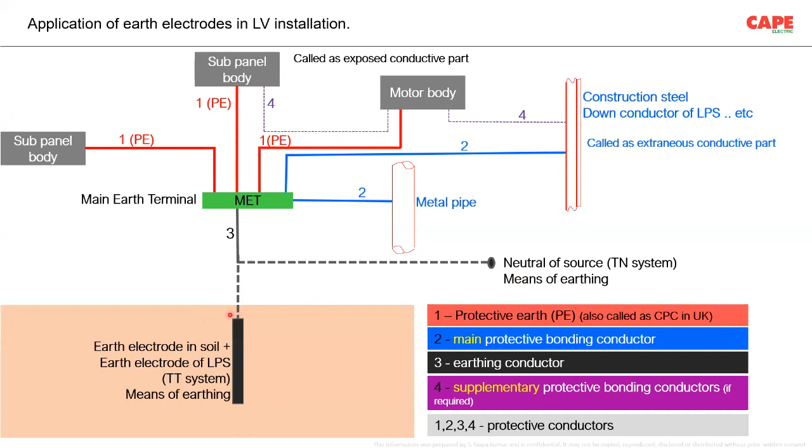Now, the only application where you need a specific value of earth electrode resistance in a low voltage or industrial consumer premises is if you go for an earth electrode in soil, especially a type A earth electrode in soil. Then people ask, what is this type A earth electrode?

In soil, there are calculations given in the standard. You have to put a certain X length of the earth electrode in soil, and if you cannot put that X length, you are supposed to make the resistance lesser than 10 ohms. So something like this, a vertical or a horizontal length.

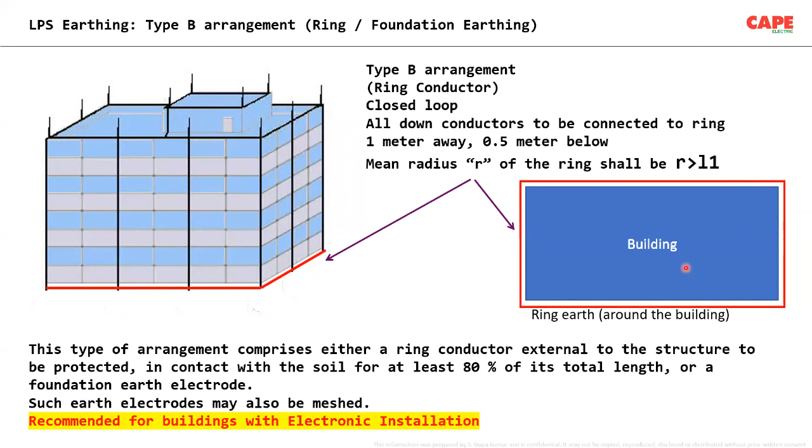In large buildings, the recommended practice is to go for a ring earth. If you go for a ring earth, again, the earth electrode resistance is not very important in a larger building. So basically, the earth electrode resistance of 10 ohms is necessary only for a building where a type A earth electrode in soil is made.

Now, to make the conclusion and the final part of the presentation: where exactly this is required, and what exactly is the background of this particular material, and how we started using it so extensively.

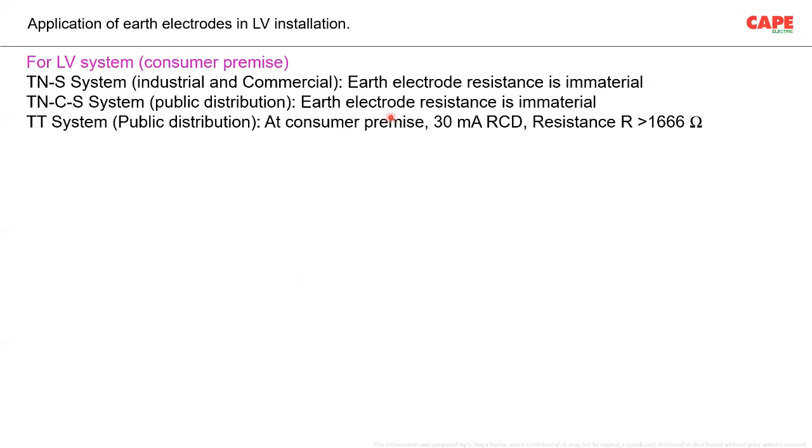Now, you know very well that for a low voltage consumer premise, if you go for a TNS system, earth electrode resistance is immaterial. If you go for a TNCS system, earth electrode resistance is immaterial. If you go for a TT system, it can be anything 1666 or 166 ohms depending upon your RCD value. For public distribution, the power supply company can have the HT side earth electrode at a certain value to reduce the temporary over voltage in the consumer premise, if they go for a TT system. For an industrial system, the earth electrode resistance is immaterial. If you have your own transformer or your own DG, and if these are within your control, very close to your premise, technically speaking, these are actually immaterial. The only place where you need a 10 ohm earth resistance is for lightning down conductor earthing, type A.

Now, what is the background? In countries where the soil temperature is below 0 degrees centigrade, imagine Russia or America, maintaining an earth electrode resistance of 10 ohm is difficult. Where is this 10 ohm required? It's required for a type A earth electrode for a lightning protection system, and maintaining this is difficult due to the inconsistent soil resistivity.

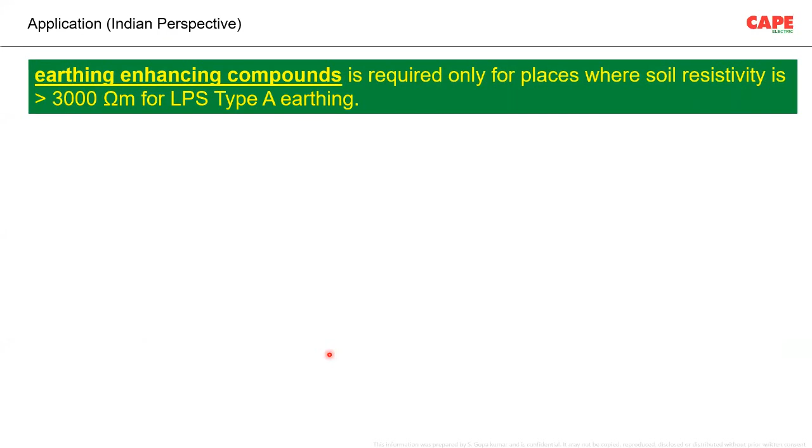So this is the only place in an international standard where you can find this material recommended - for lightning protection, where the soil resistivity is more than 3000 ohm meter, you use either a type B earth electrode or an earth enhancing compound. This is predominantly written because in countries with sub-zero degrees, this material helps them achieve a resistance lesser than 10 ohm. But for our situation, earth enhancing compound is required only for places where the soil resistivity is higher than 3000 ohm meter, for LPS type A earthing.

For public distribution, this may be useful for the utility company if they go for a TT system, interconnected system. Number 3, earth enhancing compounds used in industrial, commercial, and residential applications in India, where the soil resistivity is higher than 500 ohm meter, are helpful only in deteriorating the life of the earth electrode in soil.

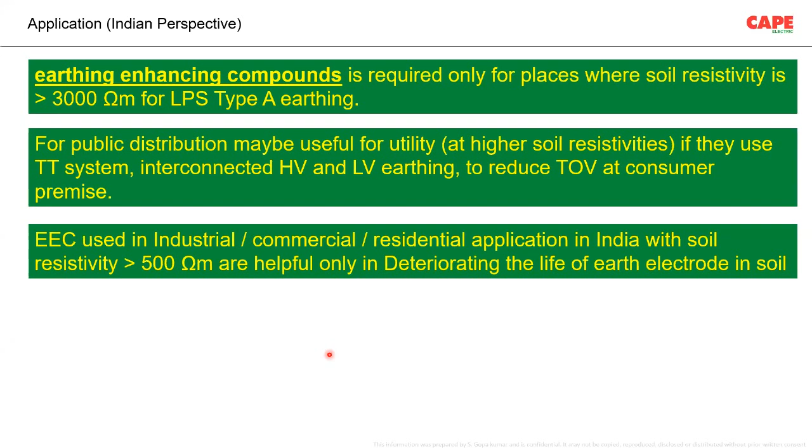The earth enhancing compounds used in India, in places where the soil resistivity is higher than 500 ohm meter, are helpful only in deteriorating the earth electrode in soil. It is never going to improve your system. A value of 10 ohm, 1 ohm, or even 100 ohm doesn't matter in a low voltage electrical installation. A low value of 1 ohm is not going to save any electrical installation.

This is the reason earth electrode resistance test is removed from IS732. All of us know that whenever there is an electrical safety audit, the first thing we do is the earth pit resistance measurement. But in IS732 2019, this has been removed. You don't need to test it anymore for electrical safety because it is not going to help you.

So if you want to make a safety earthing or do an inspection, you should measure the continuity resistance of the protective conductor. You should check the earth fault loop impedance and establish the disconnection time. You should check touch voltage across simultaneously accessible parts, floor and wall resistance, main and supplementary protective equipotential bonding, and reduced circulating currents. These are the six parameters related to earthing.

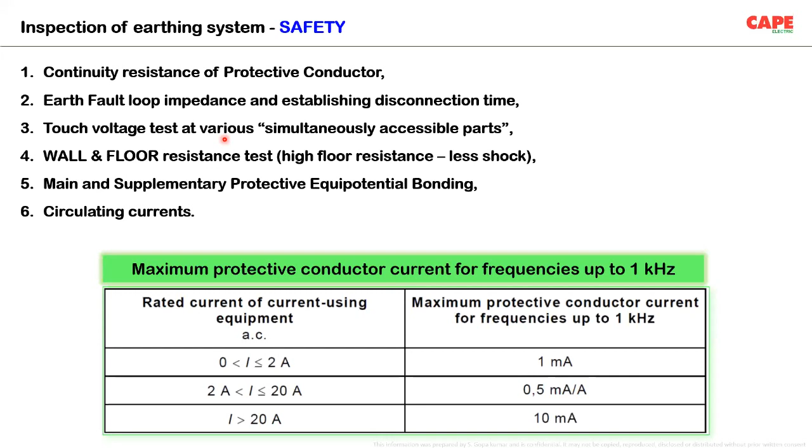Earth pit resistance measurement, unfortunately, is immaterial. As a result, since earth pit is immaterial for modern day electronics, the earth enhancing compounds are also immaterial. With this, I would like to stop the presentation.

I am sure that I have made a big subject in a short time. I don't know whether you understood or not.